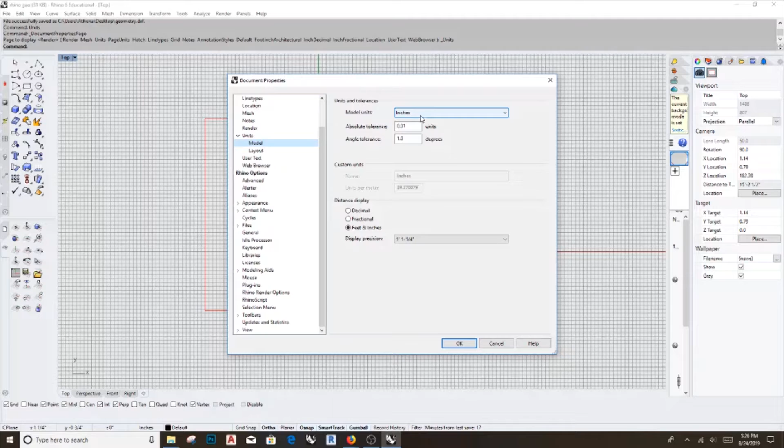So I'm going to type in units. And just make sure that the file is set to inches. If it's not, you need to change that. So once we know that it's in inches, we're going to need to export the file as a .dxf, which is what the foam cutter software uses.

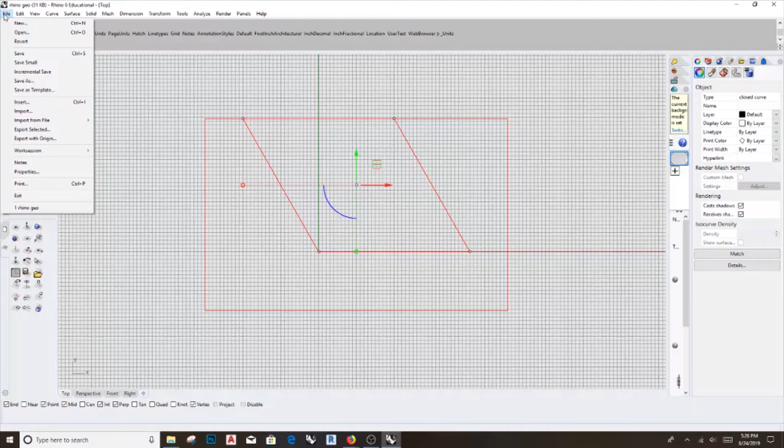So we're going to select our parallelogram and not the material, and we're going to export selected and make sure that it's set to .dxf. And you can just save this to your desktop for the time being. And just leave it at default export scheme, okay?

And now we're going to open up the DeskCNC software. And it's a demo, so just press OK. Again, OK. And you should have a drawing area with a grid similar to Rhino. So we're going to want to open up our .dxf file, and the way you do that is by going to File, selecting Foam Cutter, and then selecting the Open Larger DXF contour. So we're going to browse down to our Rhino export and open that.

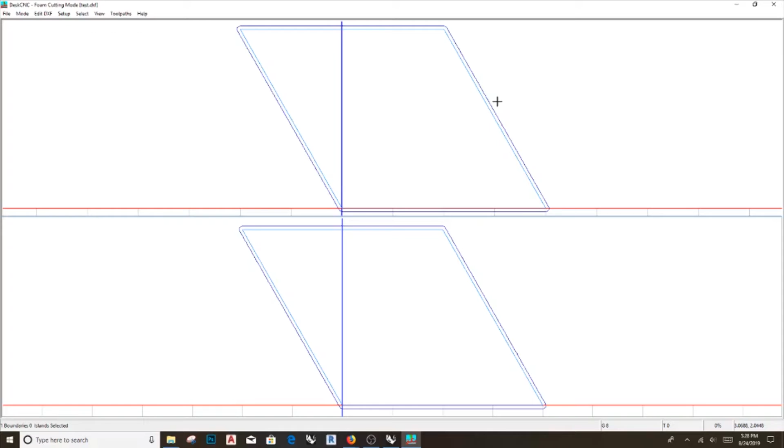So you should see this geometry, and you have two lines, one being an offset to simulate the amount of material that's going to be taken off by the hot wire by virtue of its heat melting away some of the material. And in this DeskCNC foam cutting software, the way that you can control zooming in and panning is you zoom by holding down Control and using your left click on your mouse, so that zooms in and out. And then to pan, you hold down Shift and then pan again with the left click.

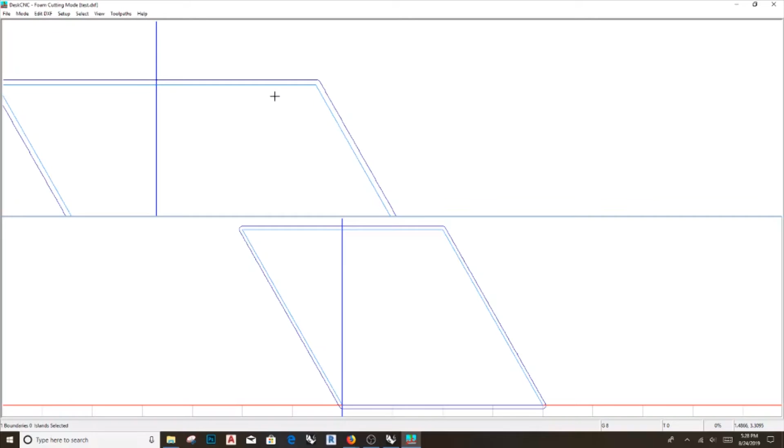So the first thing that we're going to want to do with our geometry is specify the entry and exit points for the hot wire to enter the material. So what I'm going to do is just zoom into this upper right corner, and we're going to click Edit, Change, Start, and Depart. So we're going to want to left click in the top right hand corner to specify the entry point, and then you're going to right click in the same area to specify the exit point.

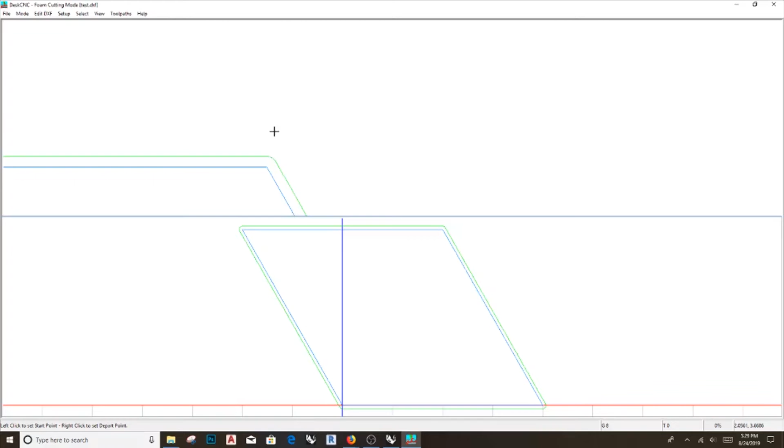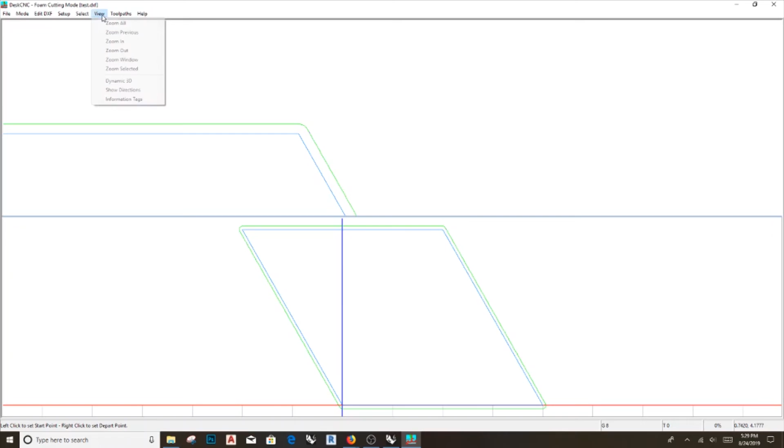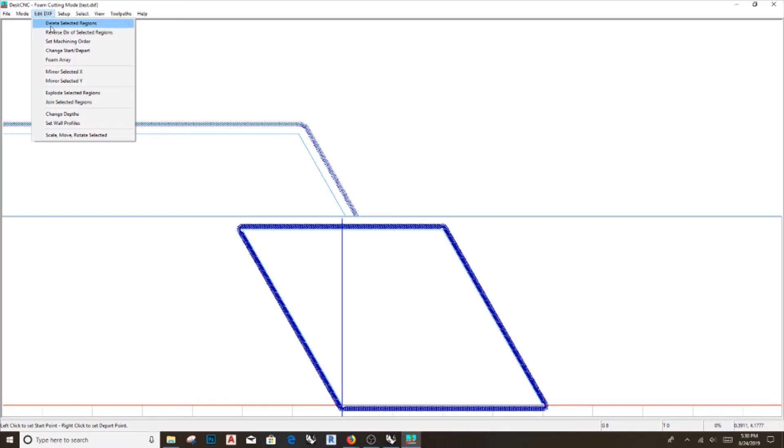So as I did that, a green outline of the geometry should have shown up, and if you zoom in very closely, you can see that there's a little black line segment. Okay, so then we want to make sure that the hot wire is moving in the right direction, which is counterclockwise. And we're going to double check this by saying View, Show Direction. So as you can see, there's all of these arrows that are going in a counterclockwise direction. So that's correct. If you have them going in a clockwise direction, you can edit that by saying Edit, Reverse Direction, and as you can see, the arrows have switched, but we're going to switch them back to counterclockwise.

So the next step is to export this file for the computer for the Hotwire to use. So this is sort of an intermediate software. And we're going to do that by selecting Toolpaths and clicking 4 Axis Foam Cut. So the settings that you overrode by copying them over into the Documents file should have already set these settings, but just to make sure, you want to see that the feed rate is set to 16 and the approach rate is set to 1. We're going to click Create.

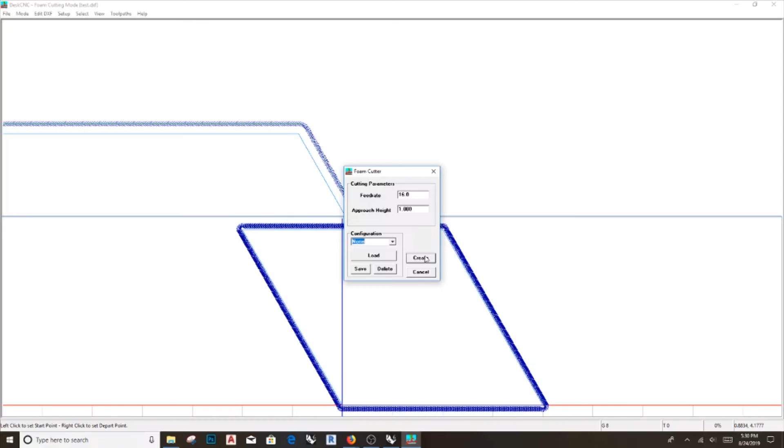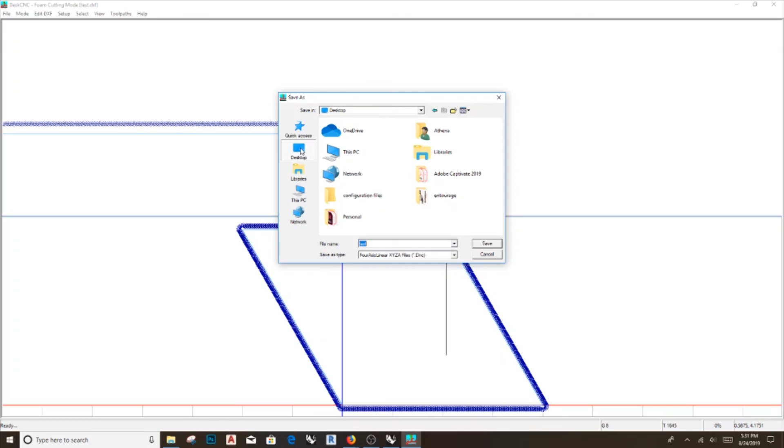And then the next step is to go back to Toolpaths and then this time click Run Machine. And this is saving it as a .dnc file, so make sure that the bottom says four axis linear.dnc. And you can save that in your configuration files or you can save it to your desktop. Okay, so here is my geometry.

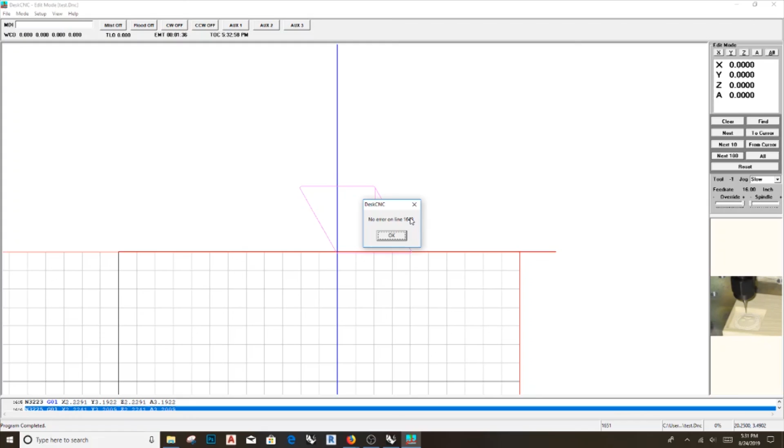And what you're going to want to do now is press Next 100 repeatedly until you get a dialog box that comes up that says no error on line 1649. It may be a different number, but it needs to say no error on line and it should be the last line. So we're set to go there and we have our file now saved to the desktop as .dnc file. And from this point, we're going to put this file onto a thumb drive and insert it into the laptop that connects to the Hotwire so that we can run our specified geometry.